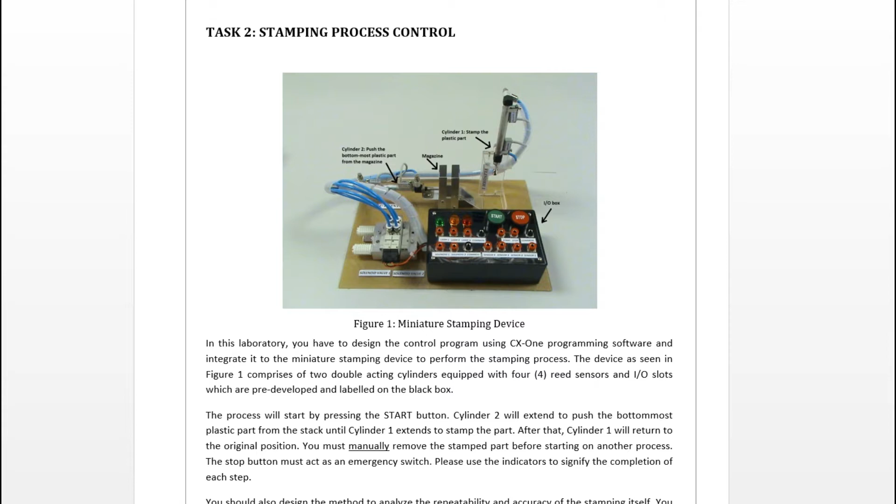So this is our input and output. We have about 6 inputs and 5 outputs. The first input is the start button, stop button, and we have reed switch 1 with 2 states: retracted and extended, and the same for C2, retracted and extended. For the output, we have solenoid 1 for cylinder 1, also known as the stamp piston, followed by solenoid 2, also known as the reloading piston.

Here we have a green pilot lamp for ready to start, a yellow pilot lamp for reloading magazine, and a red pilot lamp for stamping.

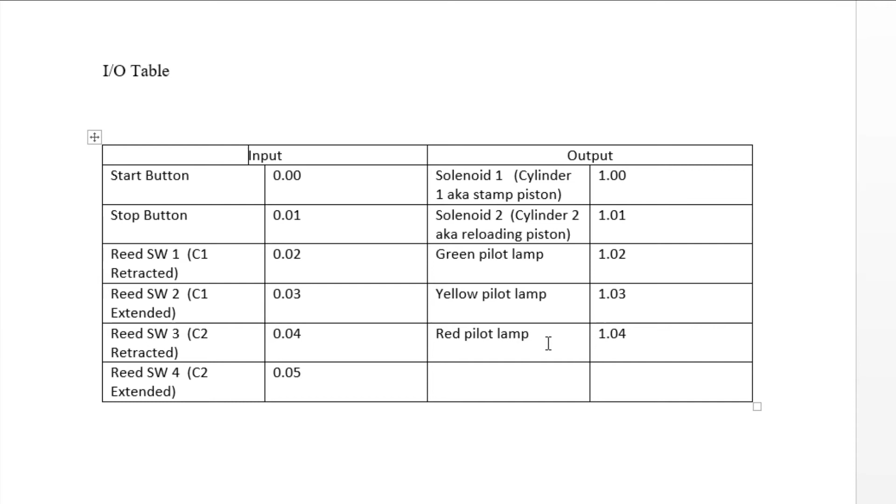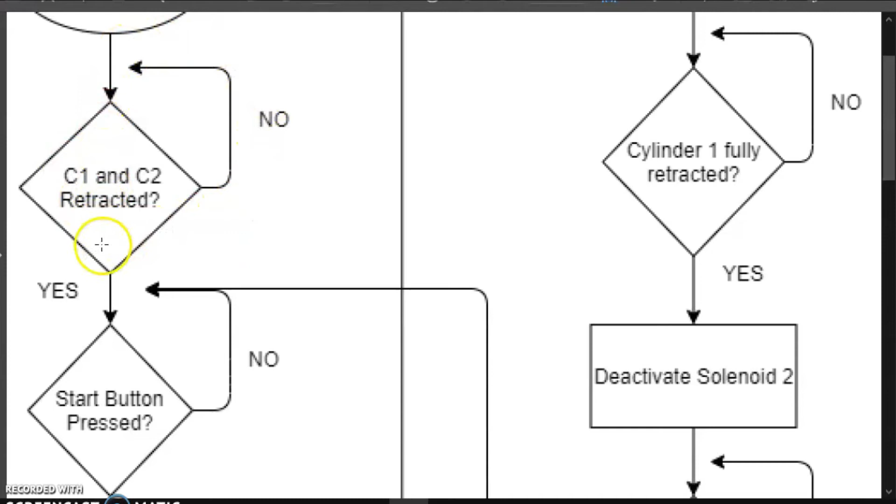This is the flowchart for the stamping process. We start with the start state. Then it will check if C1 and C2 are retracted. If not retracted, it will make sure they are retracted before moving on to the next process. Next, it will check if the start button is pressed.

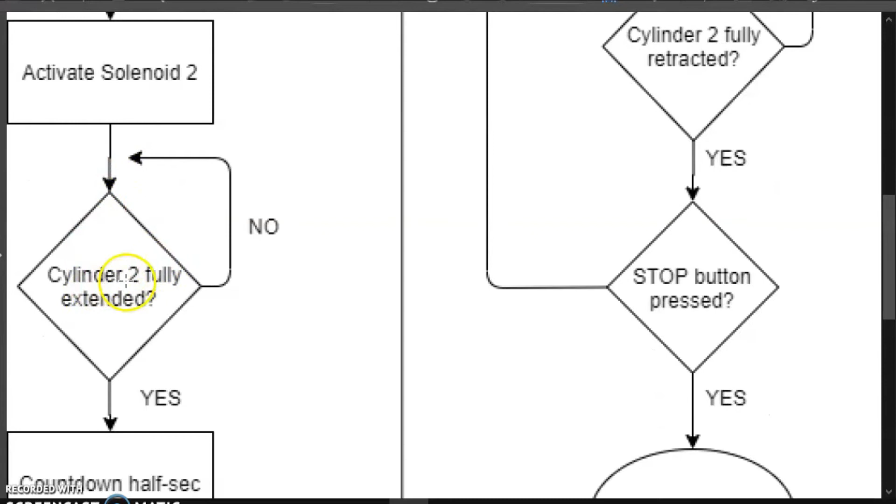If yes, it will activate solenoid 2. If no, it will wait until the start button is pressed. After activating solenoid 2, it will check if cylinder 2 is fully extended, which is detected by the reed switch. If yes, it can proceed to the next step. If no, it will wait until it is fully extended.

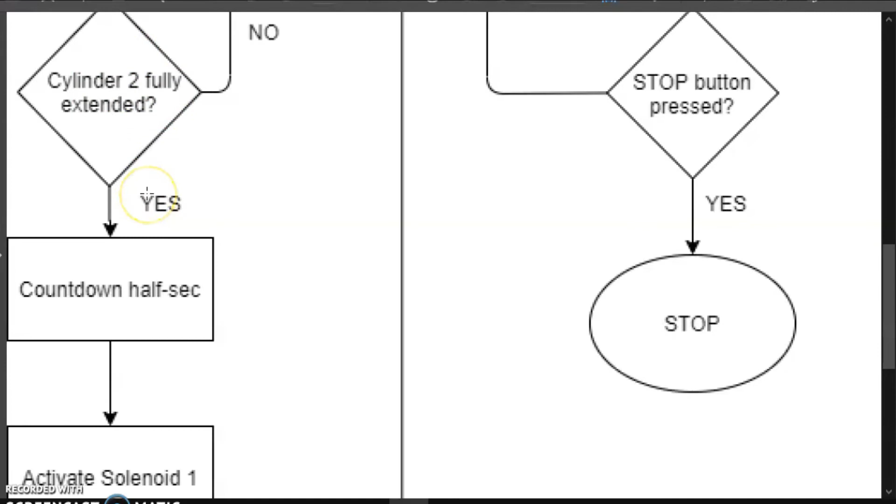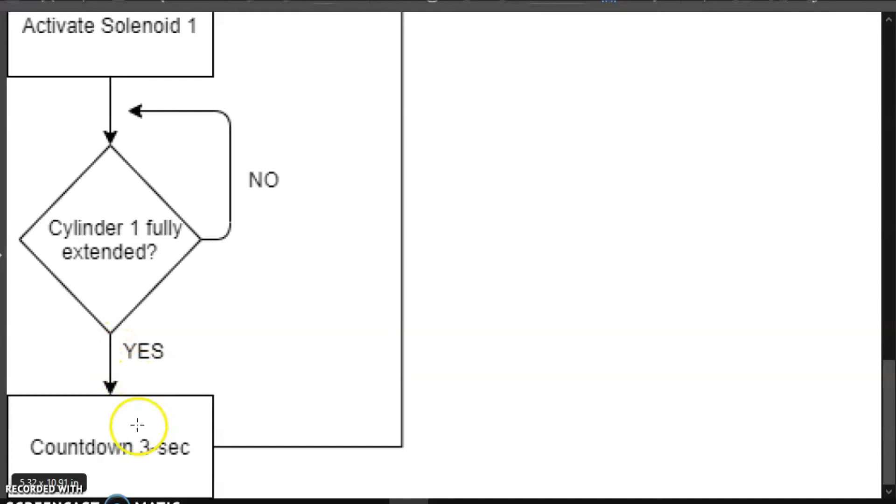After cylinder 2 is fully extended, it will count down for half a second, then activate solenoid 1. After solenoid 1, it will check if cylinder 1 is fully extended. If yes, it will proceed to the next step. If no, it will wait until it is fully extended. After cylinder 1 is fully extended, it will count down for 3 seconds.

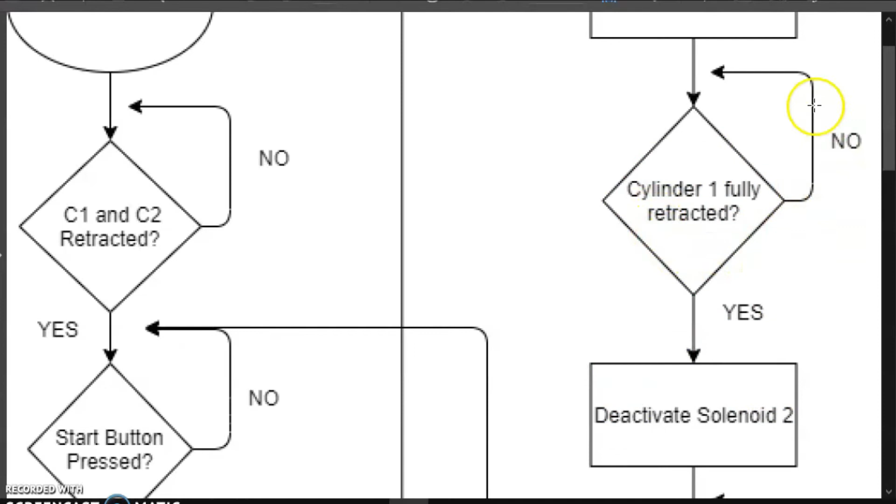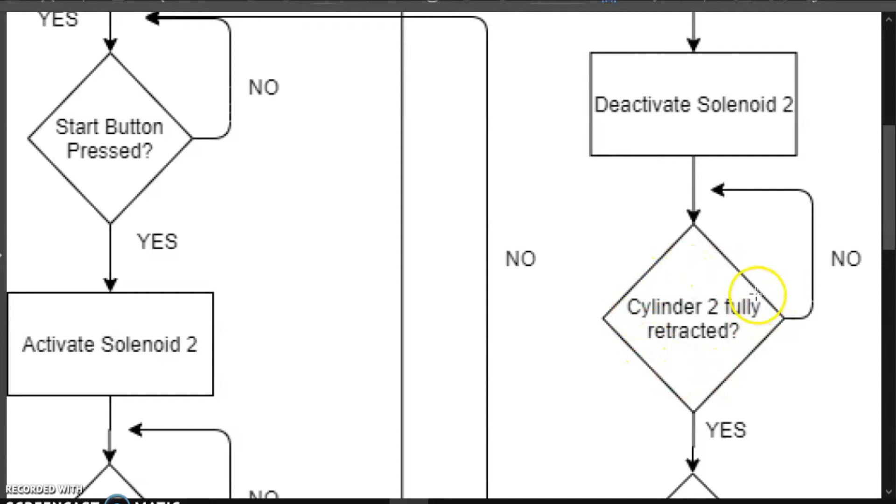After the countdown, it will deactivate solenoid 1. After cylinder 1 is fully retracted, it will deactivate solenoid 2. If cylinder 1 is not fully retracted, it will wait until it is. After deactivating solenoid 2, it will do the same, waiting until cylinder 2 is fully retracted before proceeding. After cylinder 2 is fully retracted, it will check if the stop button is pressed.

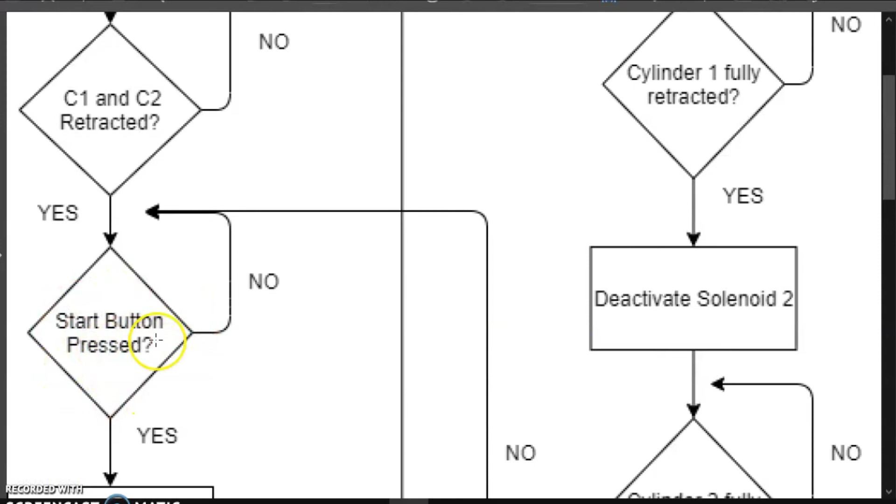If yes, it will stop. If the stop button is not pressed, it will wait to see if the start button is pressed. If neither button is pressed, it will stay still until a command is given.

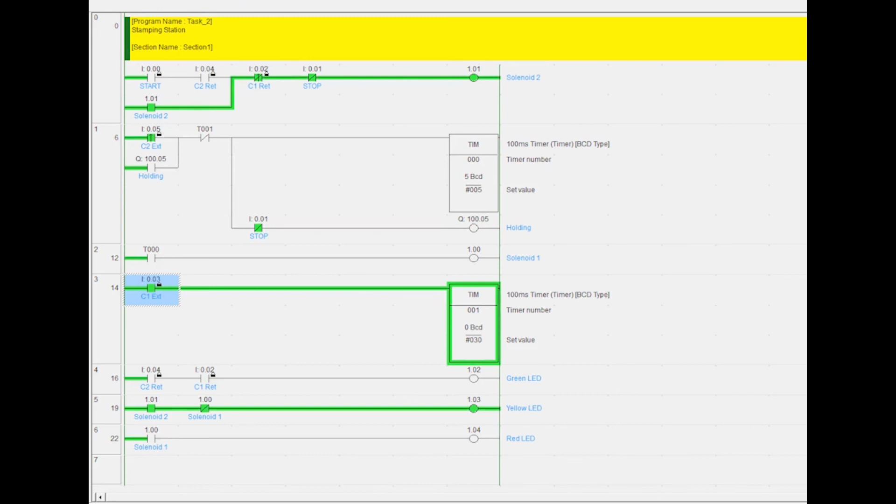So here we know that the diagram is complete.